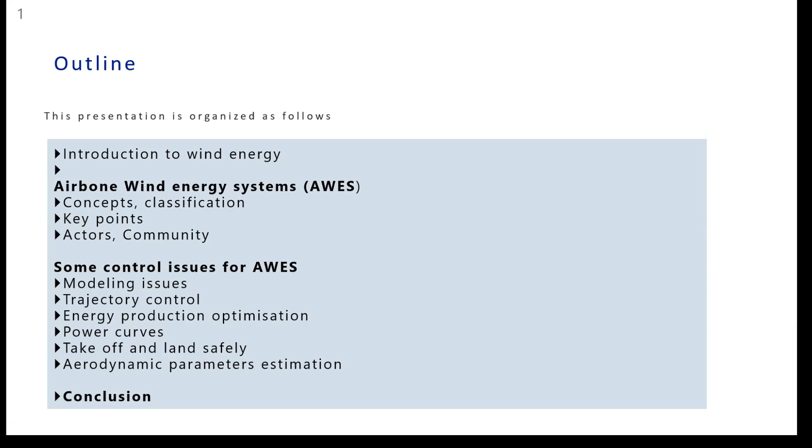Okay, we'll start by introducing wind energy, introducing the wind turbine. So when we are talking about wind turbines, this is the power produced or power available. It is related to the cubic of the wind speed available, and also it's limited by the swept area, which is covered by the blades of the wind turbine.

When we have this available power, the turbine will not produce 100%, but there is some efficiency limit of 59% of what is available. There is some work on aerodynamics and also on control aspects in order to control the wind turbines to reach this maximum efficiency and thus increase the efficiency of wind turbines in terms of energy production.

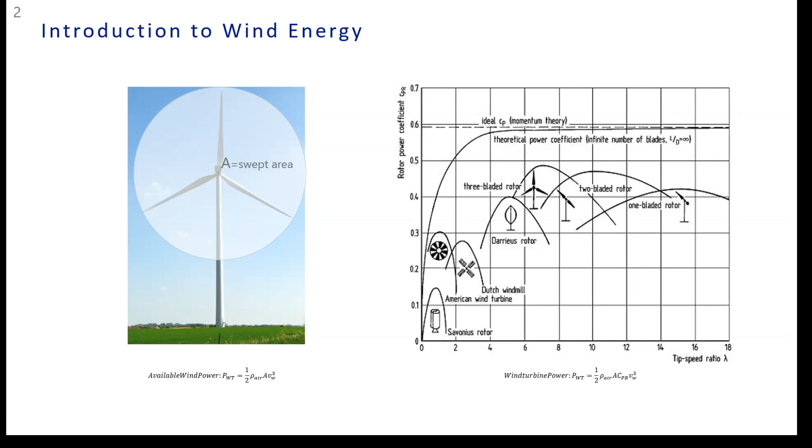So one thing also important to talk about is the power curves. The power curve is the output power for all possible wind speeds. Whenever we have a wind speed, we have this power, and this is presented by the blue curve here.

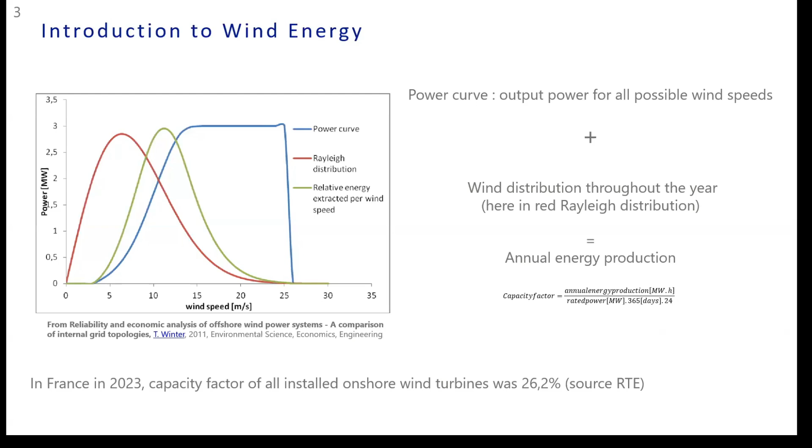Looking also at the red curve, which is the wind distribution throughout the year, we can compute the annual energy production. This comes to a very important factor for wind turbines, especially economically, which is the capacity factor: the annual energy production over the rated power. The rated power is the saturation limit for the power curve, which is reached because of power saturation for the actuators and grid connections.

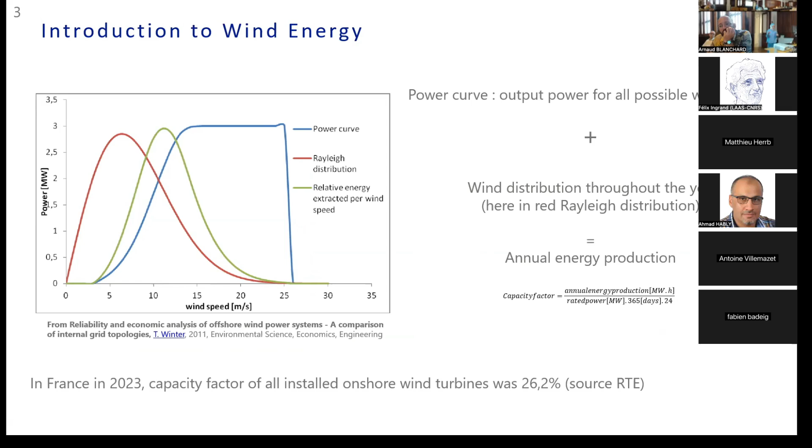For example, in France in 2023, the capacity factor for all the installed onshore wind turbines was 26%. This means that if we want to produce 1 megawatt, we have to have a wind turbine of 4 megawatts, representing the capacity factor.

Looking at how we can improve the energy production of wind turbines, there are mainly two factors. The first factor is the swept area. We can increase this swept area and then produce more energy, but here comes the drawback: it will cost more in terms of material, in terms of mobility, in terms of costing.

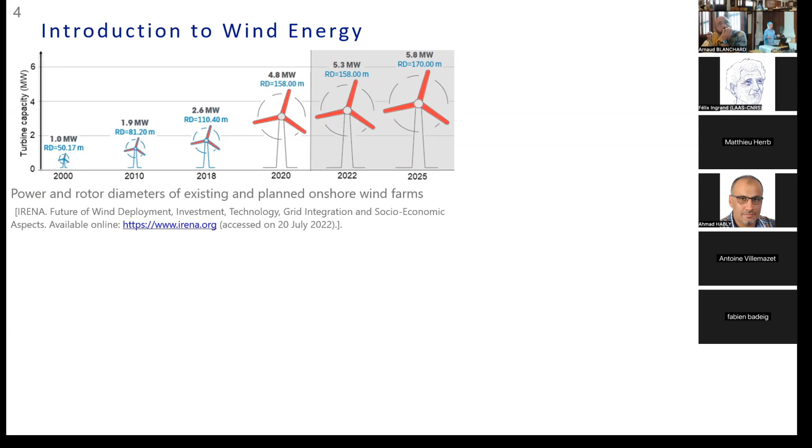And then we can think, let's search for a field which has more wind. One of the solutions is to go offshore. But also here there is complexity, especially, for example, in the floating structure that has to be added, especially when we have very deep water.

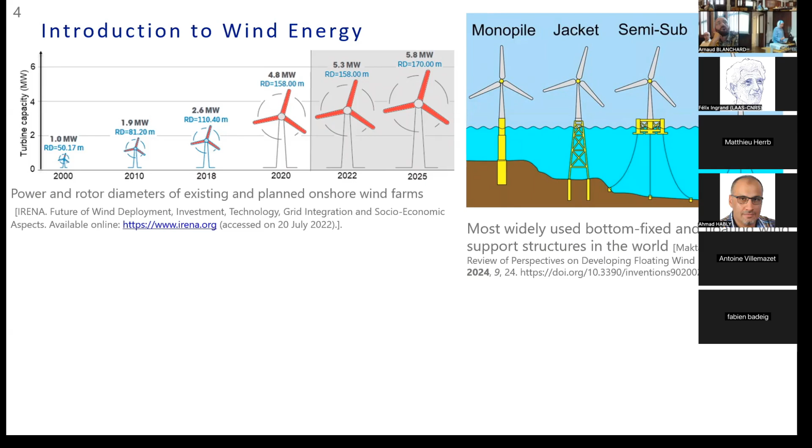So here I can conclude with some limitations of this technology related to size. For example, you can see how it's difficult to move the blade of a wind turbine, and also related to material resources, which is super important, and site availability in terms of existing wind speed.

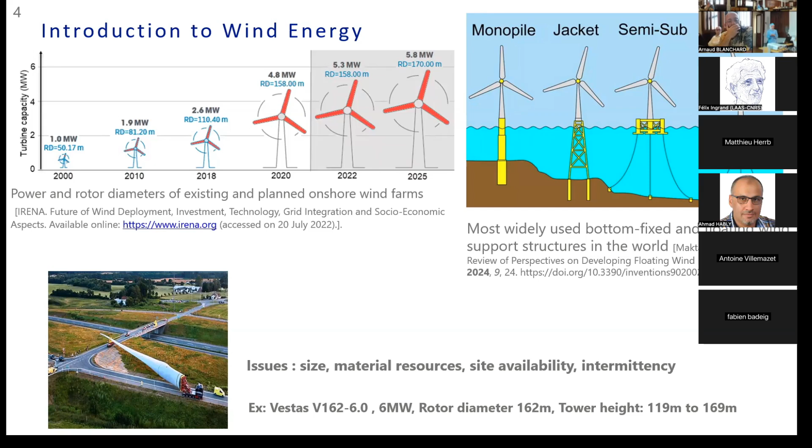So after presenting the limitations of these wind turbines, now I will present another solution or technology related to wind energy, which is airborne wind energy systems.

Loyd, in his paper, described a concept for large-scale wind power production by means of aerodynamically efficient kites. Based on aircraft construction, these kites fly transverse to the wind at high speeds. Generally, this airborne wind energy system is a kite or flying system connected through a tether to the ground, maneuvering in crosswind in order to generate electrical power.

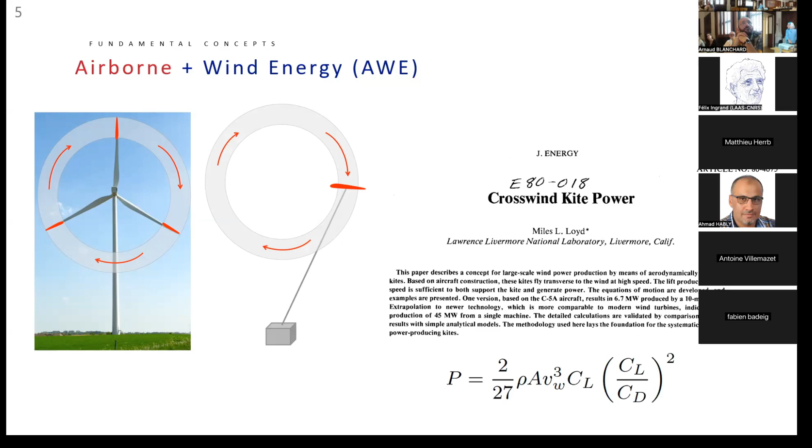Must be a video there when they are working.

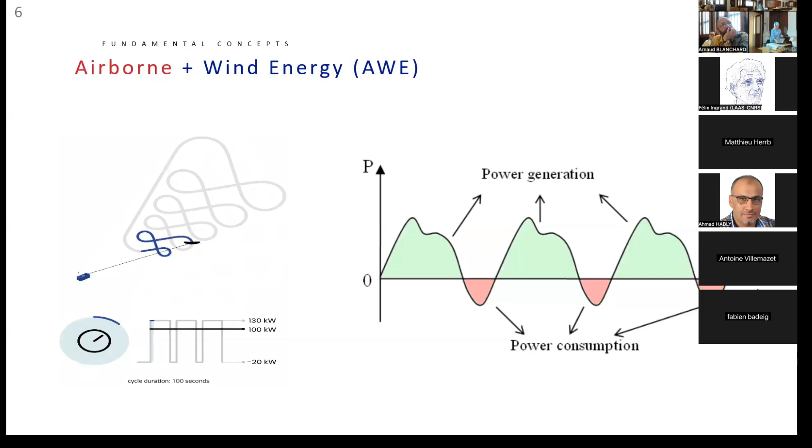The airborne wind energy system is a kite, as I've said, maneuvering in figure-of-8 trajectories in crosswind to generate power. In this phase, I am generating power in the wind. But whenever the tether reaches its maximum, it has to retrieve back, and in this phase we are consuming power — this is the negative power, shown in red, retrieving back to start the figure of 8 again. This is the main concept of airborne wind energy systems.

This system could be classified by how energy production is done, either by traction power or onboard. With onboard, propellers generate power which is transmitted to the ground via conductive cables. With traction power, we have ground power generation: the plane or kite makes a figure of 8 due to the big lift force, creating a traction force from the tether, which leads to a mechanical movement that generates electricity on the ground.

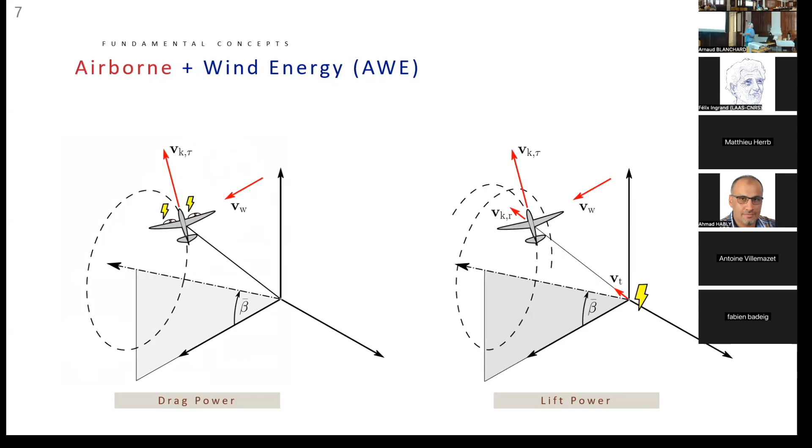In terms of kites, we can have soft kites or rigid kites and propellers, and here comes more the robotic fleets, drones, and this stuff. We also have onboard systems with propellers onboard to generate electricity, as I've said, then transmitted to the ground.

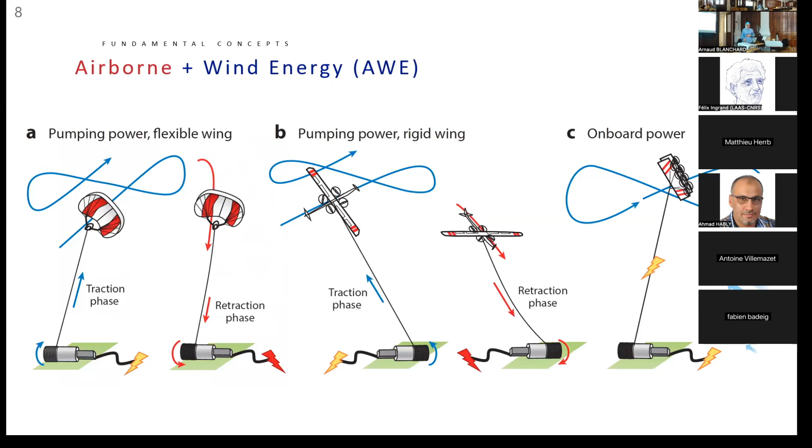One important aspect for every energy system, similar to the wind turbine, is efficiency, or here the power harvesting factor. To have a reasonable factor for power generation, maybe around 40, 50, 60, we have to make this crosswind figure-of-8 trajectory. And thus here comes the control problem: we have to control this system to track this figure-of-8 trajectory to generate good power production.

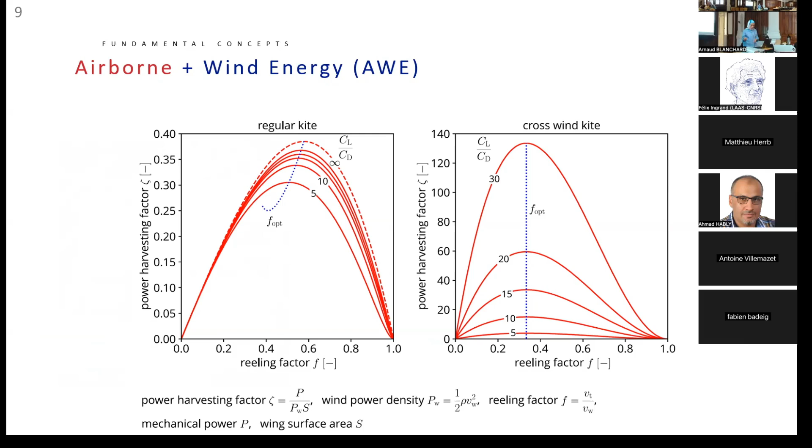Also, when we have a kite flying in the wind, we can imagine it can reach higher and higher altitudes. For example, conventional wind turbines reach around 100 meters, and for the edge of the blade it could be 150 meters. But for airborne wind energy systems, we can reach around 400 meters. At these altitudes, we may have higher and more consistent wind in order to produce energy, so this is a good advantage for airborne wind energy systems.

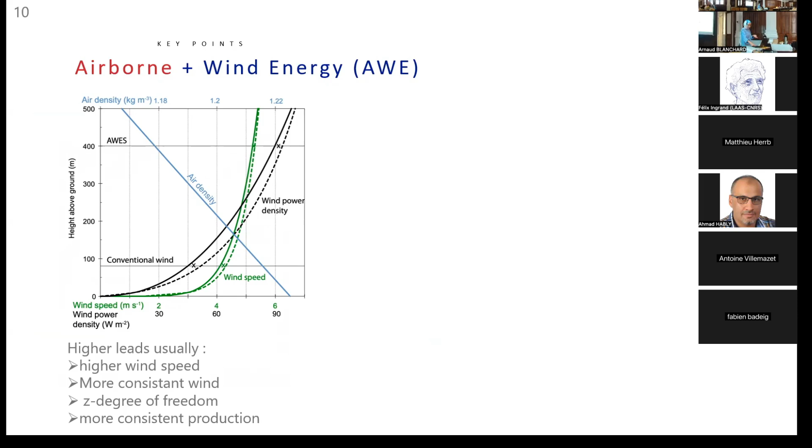Talking about materials used and footprint: we can imagine that we are getting rid of the tower and foundation of the wind turbine, which is a big amount of materials. Also, in terms of blades, we may have smaller blades, but this is still a theoretical analysis done by a startup, EnerKite, and there must be more real work to get a general view about materials. For example, the on-ground container or station may use a lot of materials, metals and stuff. There is also the maintenance of changing parts or changing the tethers.

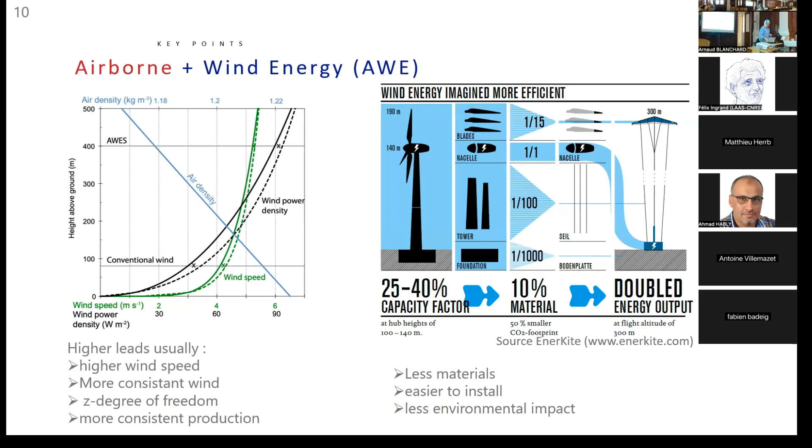To conclude on this part, comparing wind turbines and airborne wind energy systems' limitations and advantages: an airborne wind energy system can reach higher altitudes, so more consistent and stronger wind, using less material. But it is very complex to control and design, requiring a reliable and robust control stage, and it depends on high performance materials like tether materials.

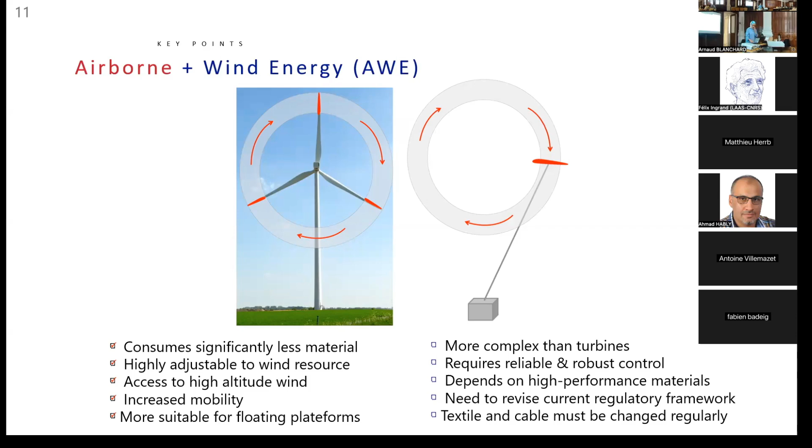Very briefly, I will present some systems done in this wind energy field. There is Kitepower, a startup with the simplest but most advanced version of this technology. Here you can see it uses soft parts, everything is soft. Here are the on-ground containers or on-ground stations. Kitepower will be in the process of becoming the first commercial technology at about 100 kilowatts.

Here are the fixed or rigid kites, more with propellers and fixed twin kites. But I want to highlight Wind Fisher here—you can see there are Magnus, some cylinders, Magnus cylinders which may generate power because of rotation. It generates lift power if there is wind. This is a French startup that our lab, Gipsa-lab, is collaborating with.

Here are some more complex configurations. Makani Power has been lost in the kite craft designs. There are also kite applications for sails, mentioning French companies like Beyond the Sea and Airseas.

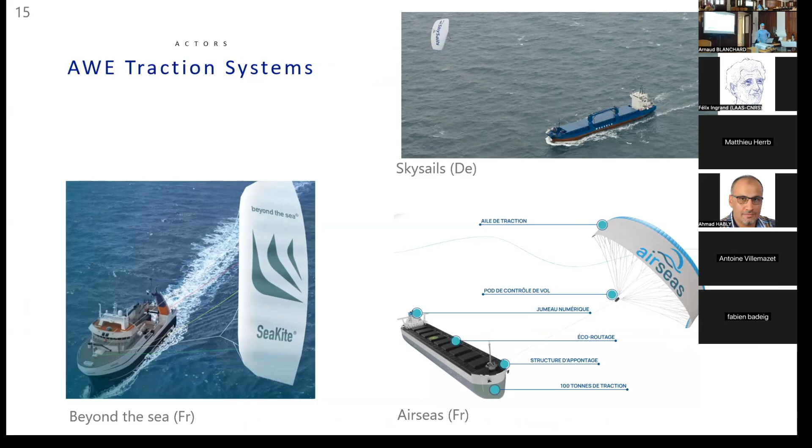Now I will move to the second part of this presentation, the control issue for airborne energy systems, since I am more interested in this concept. I will go through different aspects, groups, and phases, starting with the modeling of the system itself.

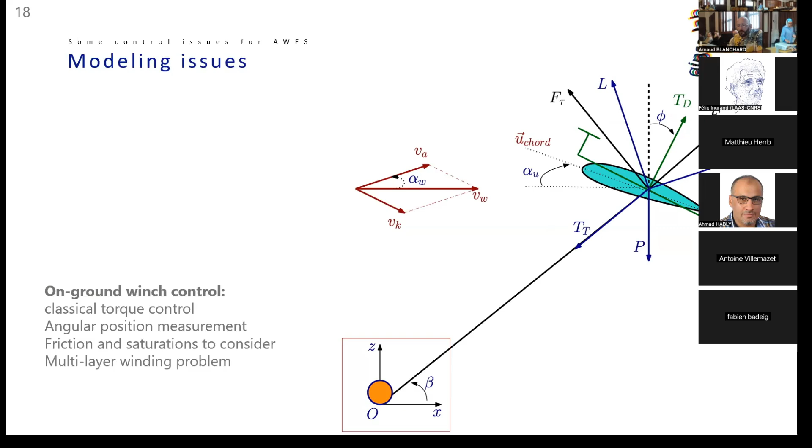First we have the on-ground part, which is the simplest in this system since it can be controlled by classical control, but we have state saturation, friction, and uncertainties in measurements. Then we have the tether, which is not easy to model—its modeling is based on multi-body models. If we don't have a good model for the tether, we won't be able to simulate or study the effect of the tether's drag on the performance of the aircraft.

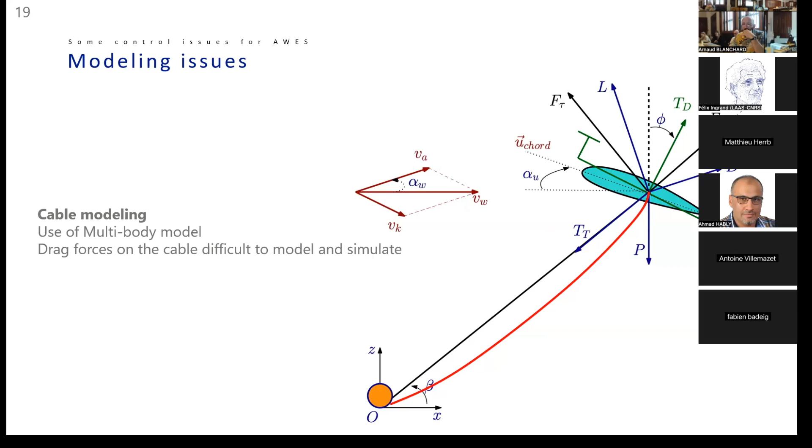Also talking about the kite itself, all the actuators in this flight system have aerodynamic characteristics, whether it's the wings or the propellers producing aerodynamic disturbances. These models are not really reliable and are complex to obtain. Since the control analysis and study of this system is based on this model, this is somehow a problem or limitation, and there must be more work in this area.

This aerodynamics depends on the apparent or relative airspeed. We need the wind speed, requiring a reliable wind sensor, and also the speed of the flight, which could be measured by GPS or other means, but we still have complexity and delay issues in communication. So these are also some limitations.

Then, in order to generate the figure-eight trajectory, we have to design some trajectory tracking controller. I will not go into detail, just note that there is a cascade control loop used to generate it.

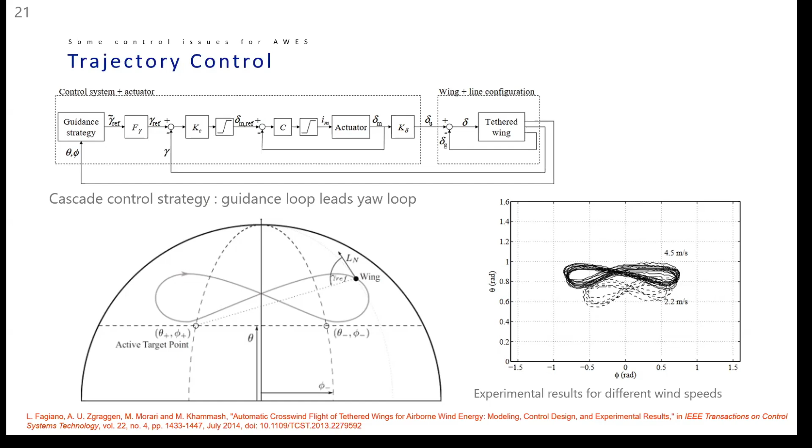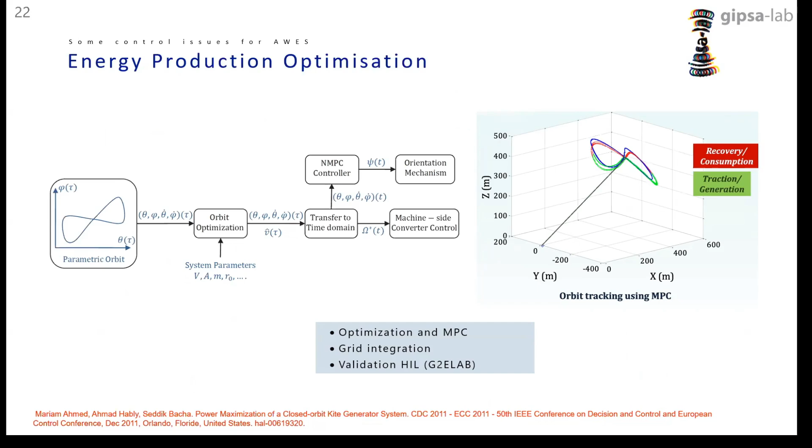Okay, and then a higher level for the control is how to optimize the energy production through the control. This was work done at Gipsa-lab, our lab, looking at a defined figure-of-8 trajectory and how to adapt it in order to optimize the energy produced.

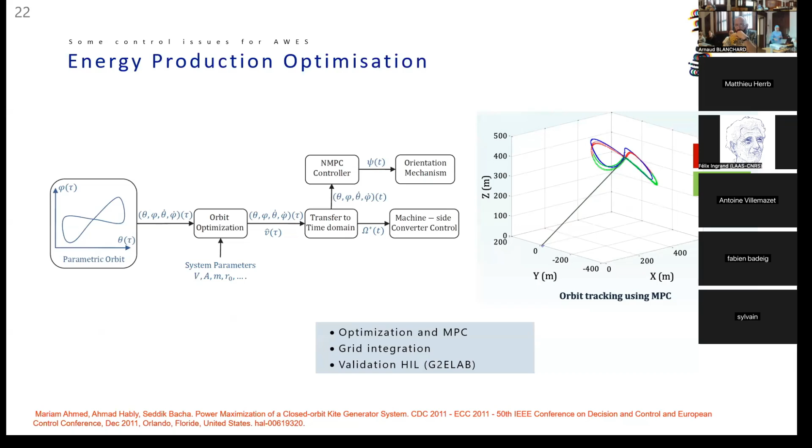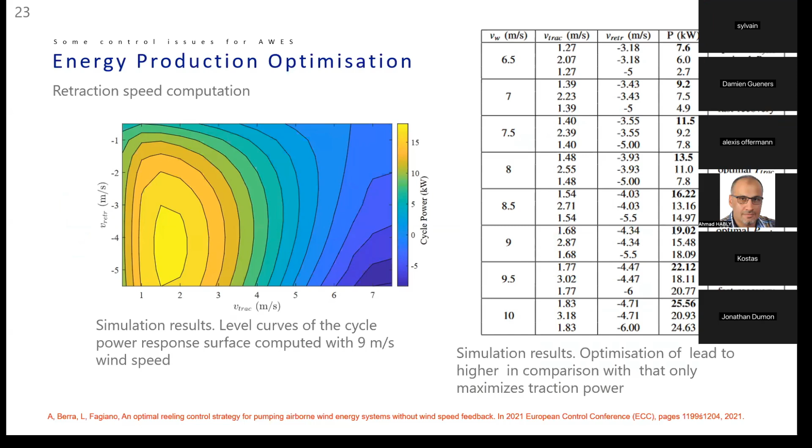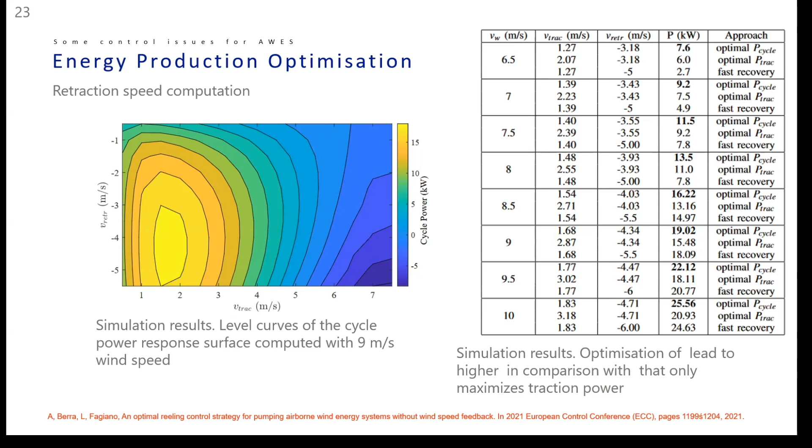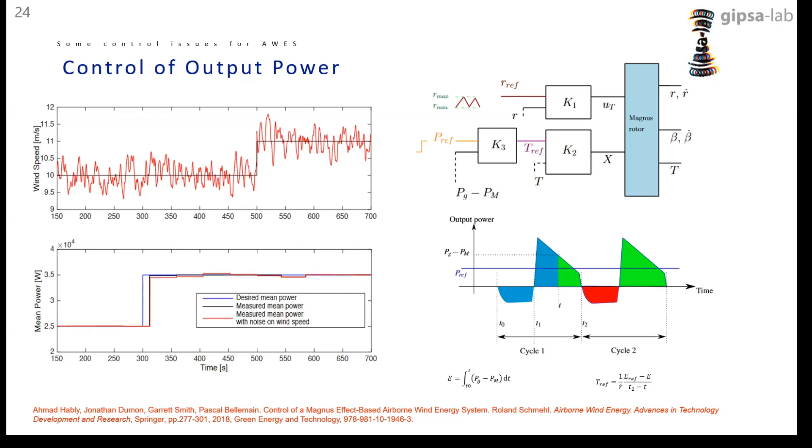Also, some work at Gipsa-lab was done on power curves of airborne energy systems. I will not talk too much about this. For the classical wind turbines they have the same trend, such that it reaches a certain rated power, because of power saturation and because of grid connections.

Sorry, the screen is not sharing anymore. But it's working, so I don't know.

Okay, now the last topic for this presentation is the takeoff and landing phases. For wind turbines, for sure, we don't have this issue - we don't have to take off or land. But for airborne wind energy systems, we have to. This is a critical phase in airborne wind energy systems, especially if we have disturbing wind conditions.

This is mainly my objective, my PhD objective, to control airborne wind energy systems during takeoff and landing phases. So I will present some academic work on this topic, using different approaches to take off and land, using different control methods, using different systems.

In order to compare these takeoff and landing strategies, there are some quantitative and qualitative criteria. First is looking at the additional power installed - if we want additional propellers to take off, this means additional onboard power and additional onboard mass. Also looking at the ground area occupied for the takeoff and landing, how much area we need to take off and land.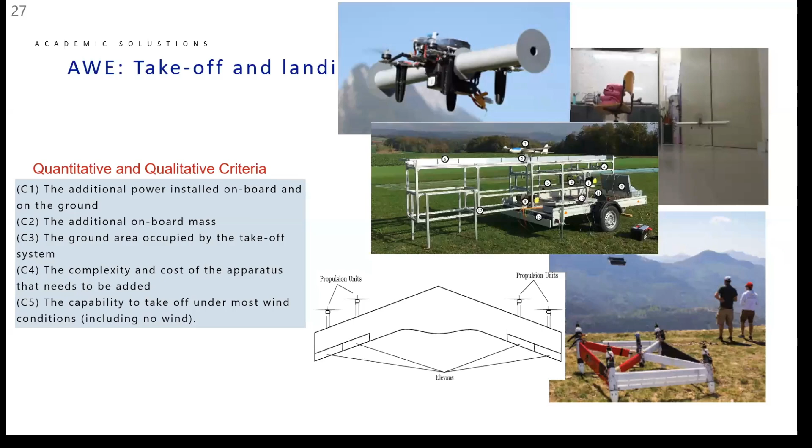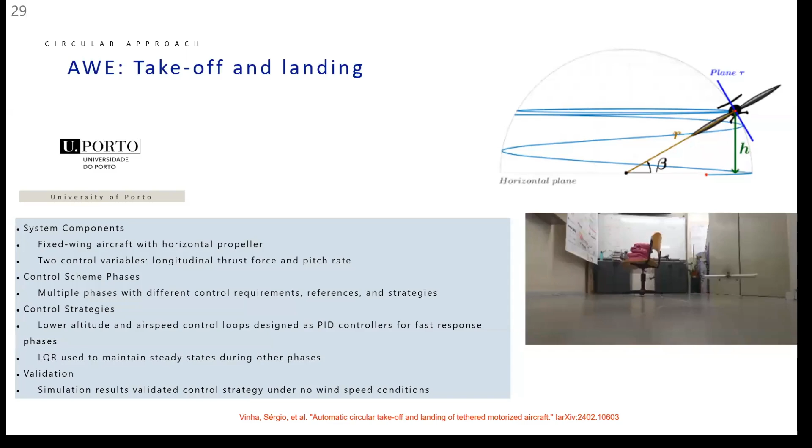Also, they used the same approach, which is circular takeoff, but in this case the kite is connected to a rotating arm. This rotating arm rotates, accelerating the kite, and whenever it reaches enough speed, it is detached and then flies to altitude.

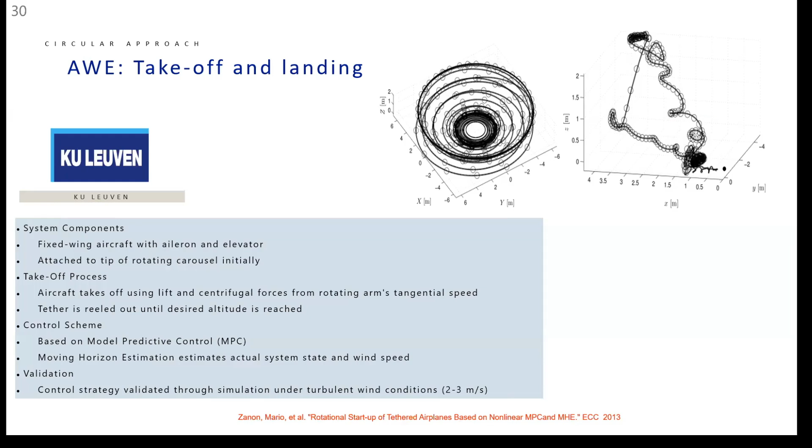Their plan at Politecnico di Milano was to take off and land vertically, but the system was this box-wing drone. It was controlled by cascade PID controllers, and it was tested in simulation, but with no wind speeds.

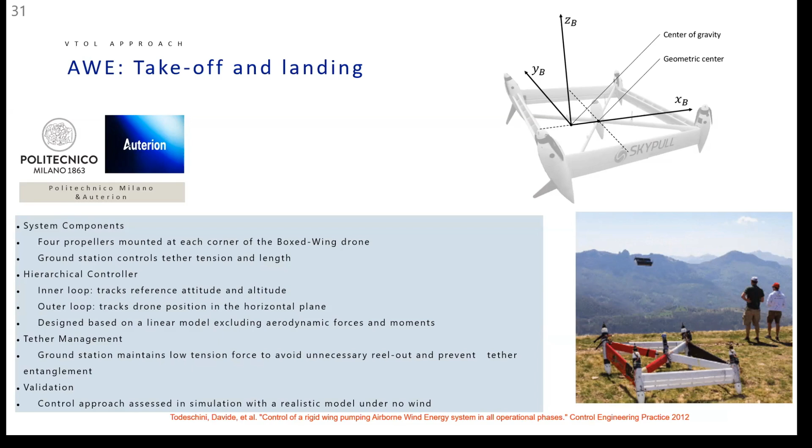There is a work in Aachen University talking about this complex structure, which is a vertical fixed wing with propellers. The most critical part is how to control the pitching of the system. They found that for a certain low speed, between 5 and 10 meters per second, they will not be able to do this pitching control, so they proposed some design approaches to improve these critical situations.

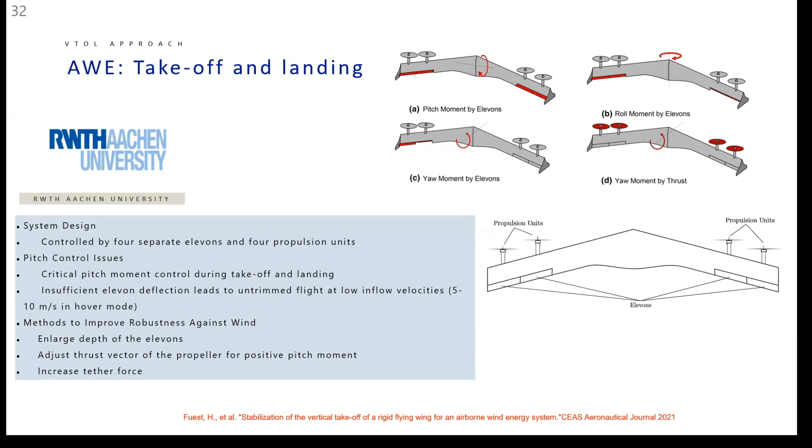Coming to our work at Gipsa-lab, this is also concerning vertical takeoff and landing, but using a feedback linearization control to compensate some non-linearities in the model of the system. We are also using a sliding mode control, which is used to be more accurate in terms of wind disturbances, to be more robust against them.

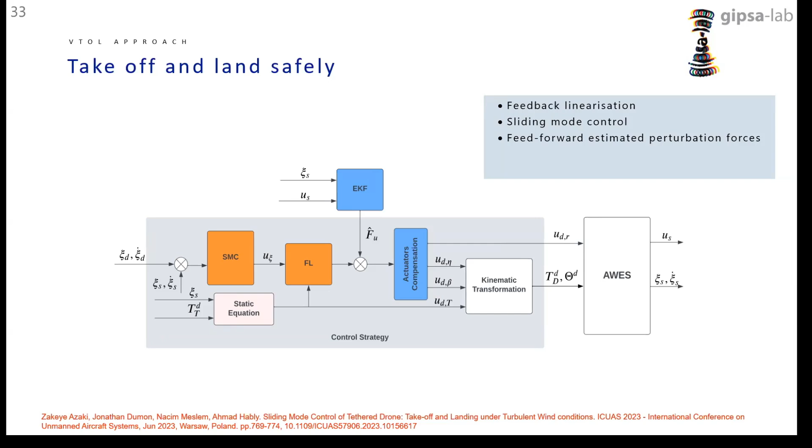For example, in my PhD we are working on this system. It is composed of a quadcopter, and we have these two cylinders - the Magnus cylinders. So here we have as if two actuators: the quadcopter on one hand, and the two Magnus cylinders on the other hand, which generate lift and drag to be used in takeoff and landing.

In this case, we are using an optimization-based control allocation strategy to allocate the force contribution between the quadcopter and the two Magnus cylinders. Here, the wind is not only considered as a disturbance during takeoff and landing, but also as a source of lift. So we can reach higher wind speeds to fly, takeoff and land, and also reduce the power consumed by the quadcopter, because now the Magnus cylinders are helping it.

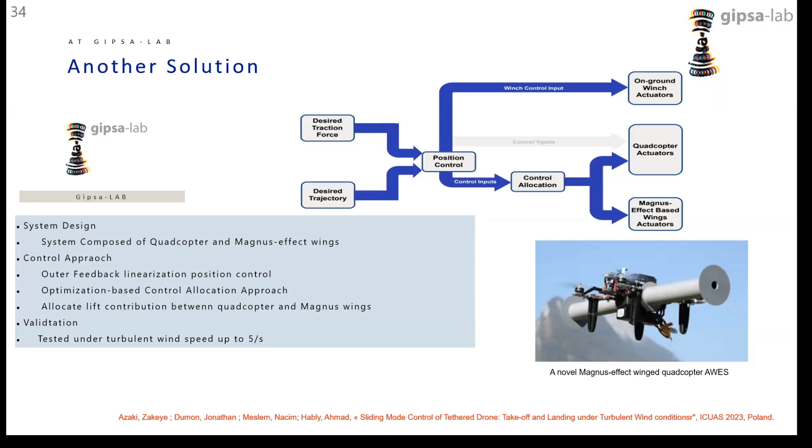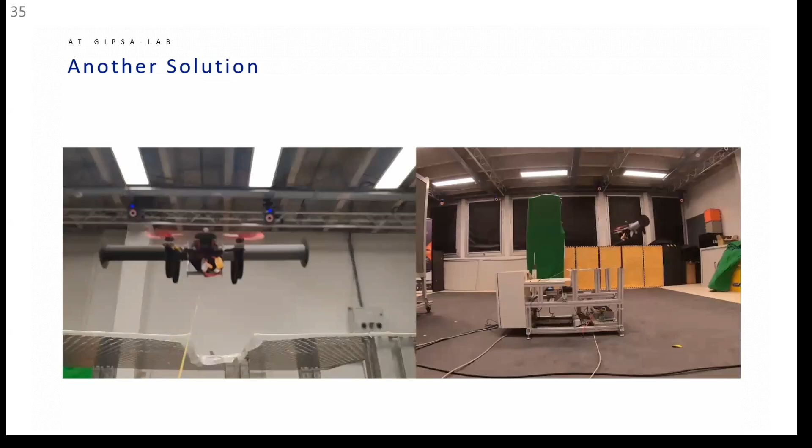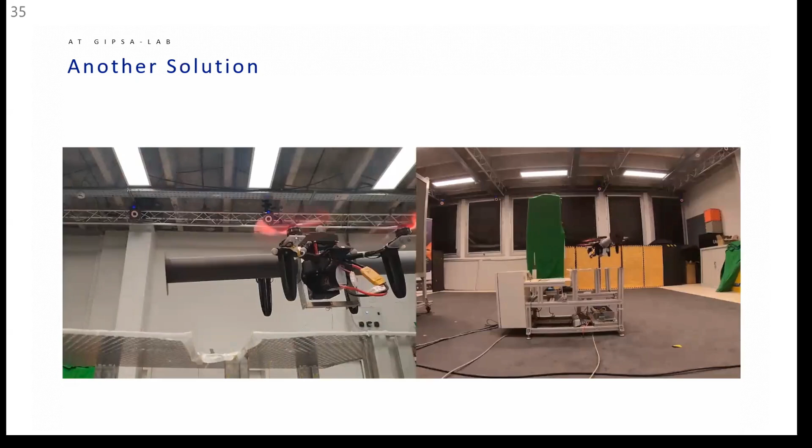This is a video of takeoff and landing under 4 meters per second. We can see how critical the landing is for such a system. We have wind turbines which produce very turbulent wind speeds. Now for 6 meters per second, we crash, and then we take over manually. This is because of some saturation of the actuators, due to some aerodynamic momentums.

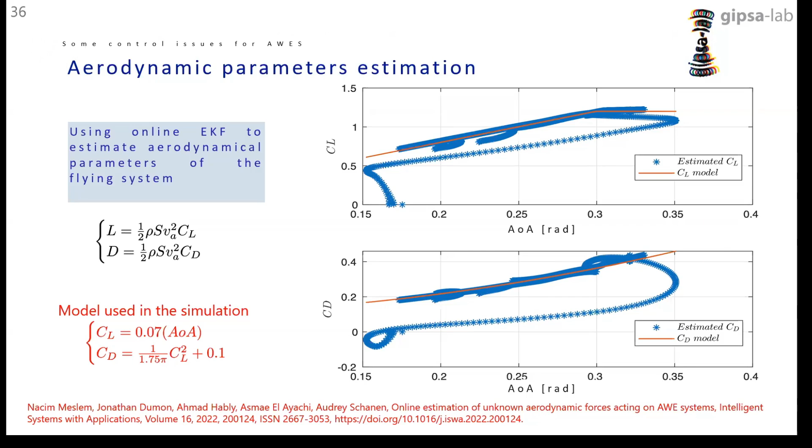For a conclusion, I presented the airborne wind energy system, which is promising in terms of energy production, but also still a very complex technology. So further studies are needed to realize its full potential. None of the projects has proven more than a few days of operation.

For the automation of the system, we have to think about automating the full cycle of the system: the takeoff, the landing, the power generation, the retrieval phase, and also the transitions between them. We have to deal with some regulations, for example interference with air traffic and ground use in case of radar. Also, we have to think about durability of materials to sustain a high number of load cycles, since critical components like tether and kites are used, and look for reliability and safety of the system.